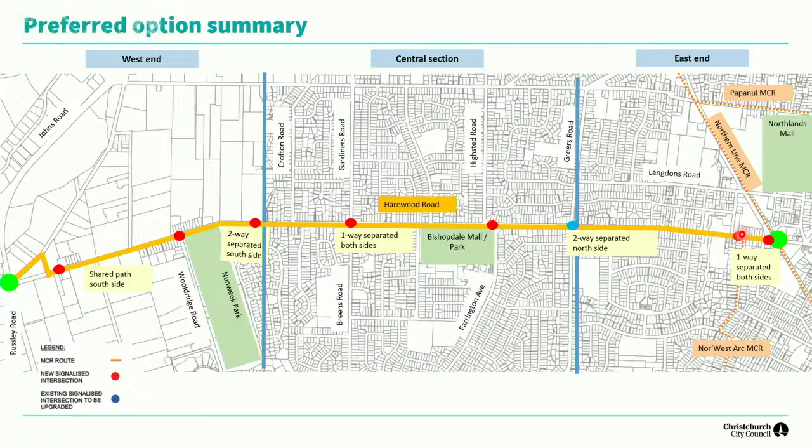That runs all the way through the Gardiners intersection with new signals, past Bishopdale Mall to the Bishopdale roundabout, where it changes to a two-way on the northern side of the road, through an upgraded Greers intersection, and a two-way continues through to the Chapel Street area, where it splits to one-ways either side of the road, running past Mitre 10.

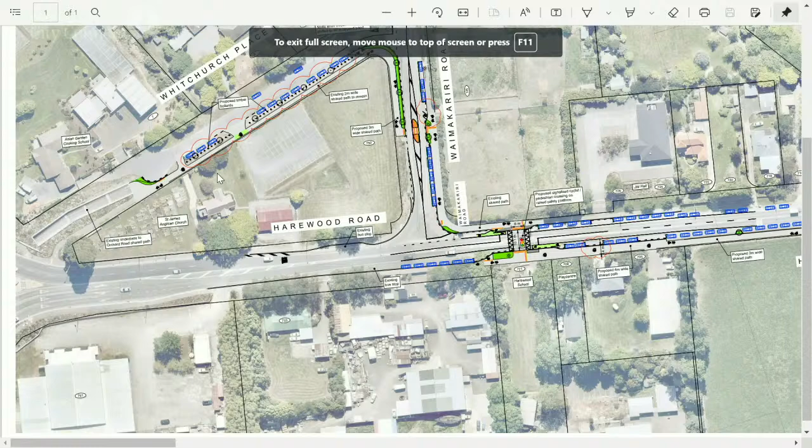If I run through that on the consultation plan - these are the plans that were available at the information sessions. We had those sitting in the middle of the room, highlighted so people could talk to them. In the red shadows there, we'd identified changes that had been made since March, with a list of the changes and a description of what they were. So you've probably seen that already.

Here's the underpass at the roundabout, shared path that runs along the south side. It retains car parking on both sides of Whitchurch Place. The path comes around and then crosses over via a central island on Waimakariri-Harewood, and the shared path continues down - that's an existing shared path. Then there's new traffic signals outside Harewood School, on a raised speed platform, for pedestrians and cyclists.

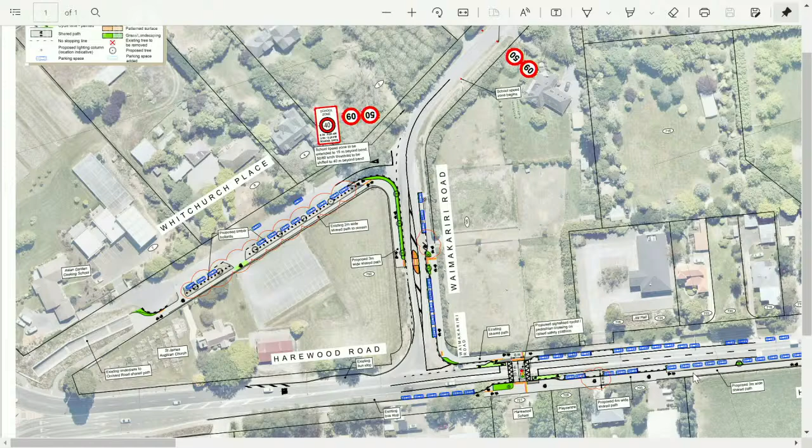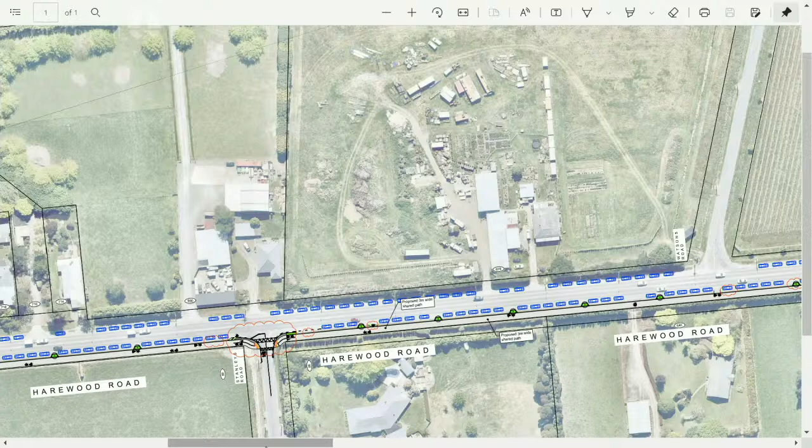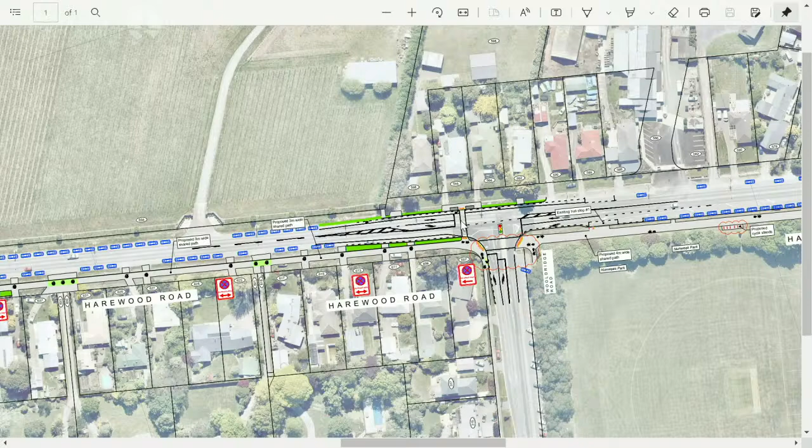That leads us to a shared path on the southern side of Harewood Road - an existing path that we'll be widening out to 3 metres. That continues along the southern side of Harewood Road, crosses over Stanleys Road, all the way up to Woodbridge Road. New traffic signals at Woodbridge Road, crosses over, provides a connection across to the bus stops to the north. We continue the shared path past Nunweek Park.

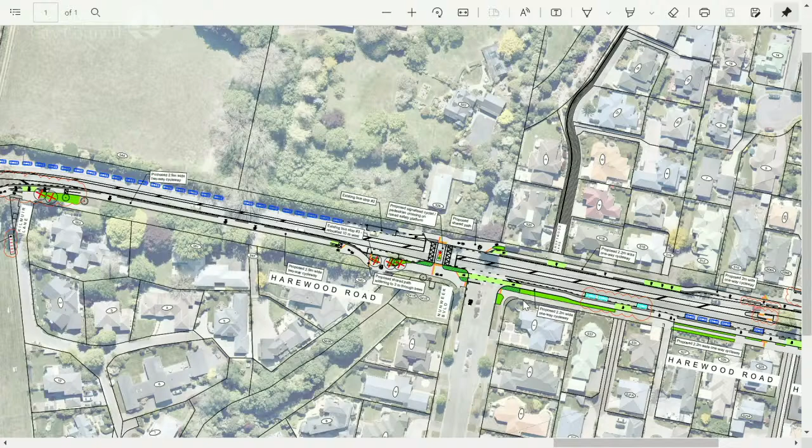Up to Nunweek Park. At Nunweek Park it was too tight to continue the shared path on the property boundary, so we've provided a two-way on the south side running through to Nunweek Boulevard, where there's another set of pedestrian and cycle signals on a raised platform. At this point, the shared path changes to a one-way path on either side of the road, and that's effectively where we start to enter the central section, or the 4-lane section. Continuing along through this section, there's a one-way on either side of the road.

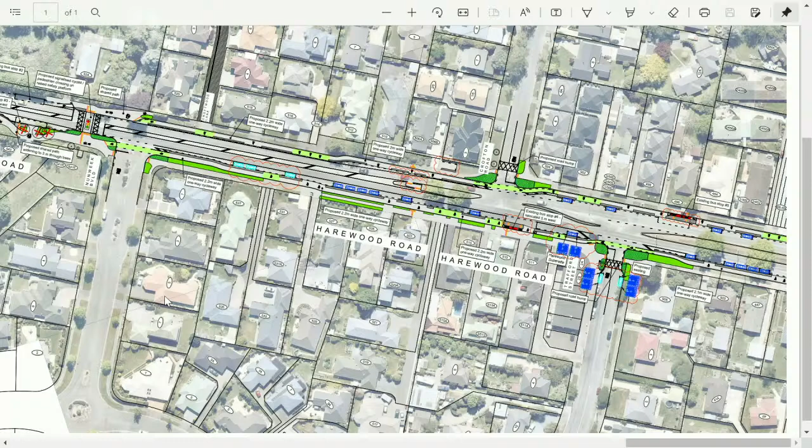I guess we'll find out. Very close up. Just give me one second.

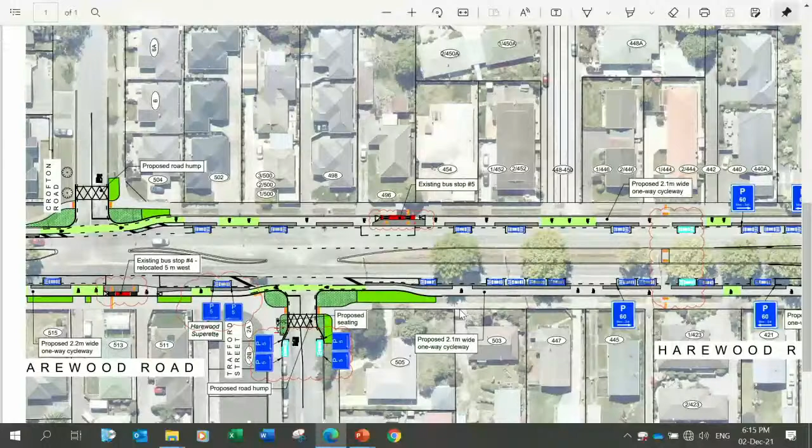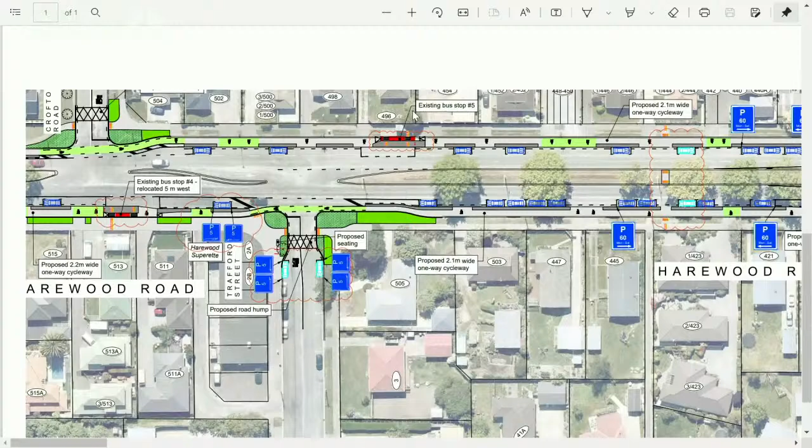Something funny's happened with that. Try and jump into the other folder. Something there. Was that?

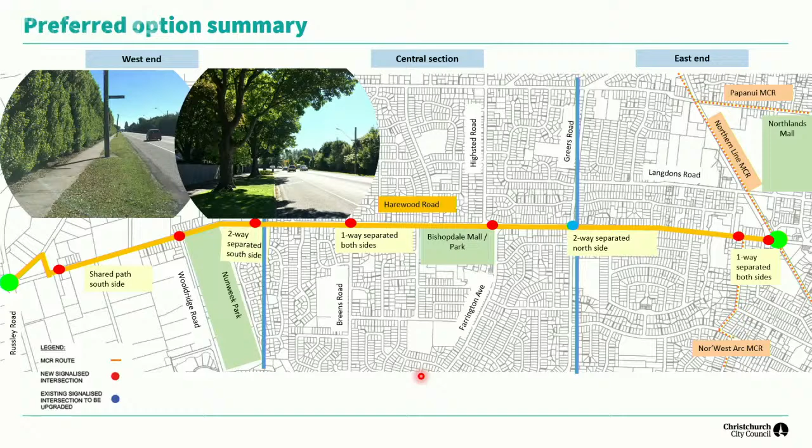So at the west end we had the existing shared path that's going to be widened. Then we run past Nunweek Park, where we have the existing trees. We couldn't widen the path, so we went up to two-way on the south side through the central section. One way is on either side, and then at the eastern end it's a two-way on the northern side.

So I now hand you over to Anne, who will run through the consultation.

So this is just a project update, going right back to just a really quick reminder of what we've done so far this year. We held the original round of consultation at the beginning of the year from January through to March, and that was our major consultation, which generated over 1,300 submissions. On the 11th of February we had our notice of motion, which Lynette referred to earlier. And going into June we then held two separate community board briefings, both with Papanui-Innes and with Fendalton-Waimairi-Harewood, briefing on the consultation outcomes from the round of consultation earlier in the year.

From there we then went and briefed the hearings panel. Again, this was live streamed, and that's again looking at all the options as well as the overview from the consultation earlier in the year.

On the 26th of October we had our community information sessions. We had a session for elected members to come through and view our display, and then 27th through to the 29th of October we held 3 days in the ex-ARA campus building in Bishopdale Mall, where we opened up for the public to come through and look at all the work that we'd done since the close of consultation and all the different options, and the team were available to answer questions.

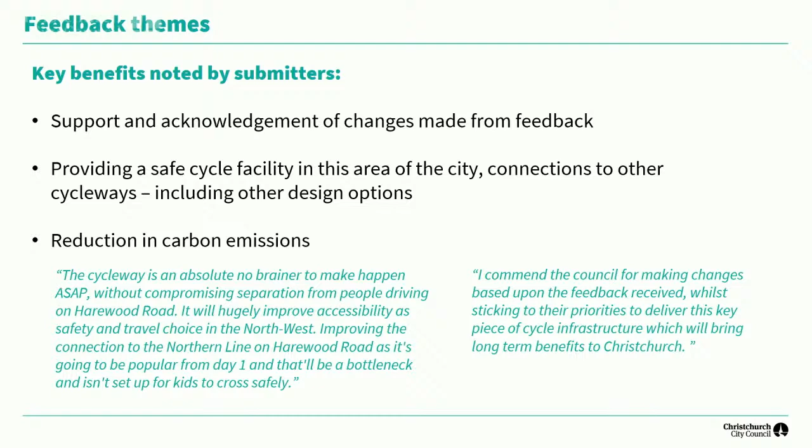Just a recap on the community board submissions from earlier in the year - I won't go through those again since we've talked about those at a number of presentations. So just the highlights and the concerns: both community boards support the cycleway program, though there is concern from both around parking loss, safety, and tree removal. Initially there was support from both boards for the overall cycleway program in the city.

Thanks, Anne. But before we move on, are there any questions from the community board or any discussion points from that?

I had one question about the 34 that didn't support - the next slide showed the reasons why. I thought it might have been financial, as someone mentioned the huge cost. Cost was probably the number one concern raised, with 16 submissions citing it.

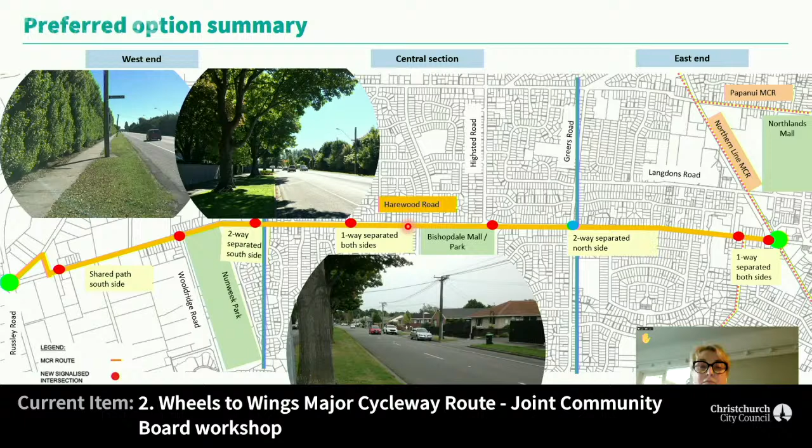Well, it might be better if we continue on and briefly touch on all of the options that were considered through the 4-lane central section. Okay, cool. And then we have all the background material on the number of parks removed for different options. Okay, alright, I'll hold fire.

Thanks, Ollie. I'll take a question from Shirish. Thank you, is this okay? First, a compliment to the staff for arranging the community meetings - they were wonderful, thank you. And a huge contrast from the first meeting, which some of us will remember, held in the Breen School. So thank you for that.

Second, two questions: do you have an overall map showing what has changed between then and now at a broad level? Second question: there's a proposal to extend one of the routes along Harewood Road - it's under consultation, which finishes soon. Does that impact our design in any way? It's Route 17, I think - is that the bus route? Oh, right.

Apologies. My understanding is that any changes we're proposing do not impact what ECAN are proposing around the number 17 bus route, or the 28, whichever one it is that goes up there.

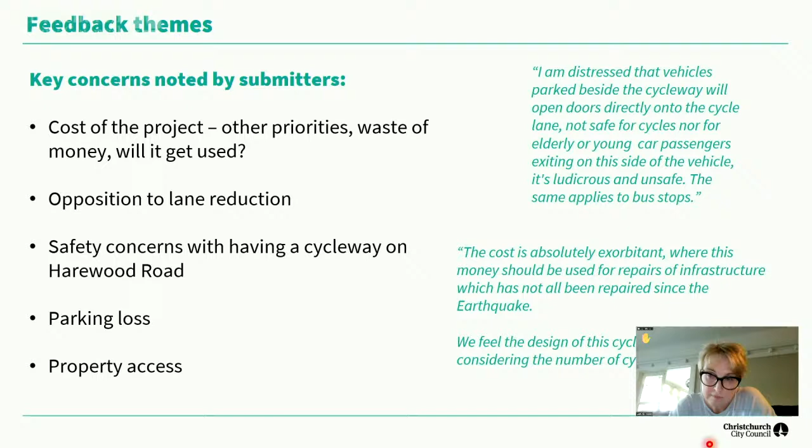What kind of feedback doesn't indicate support or no support? I was really interested in that figure because it was a significant number, where it said no clear indication for support. I'm just wondering what kind of feedback you're getting that's not showing positive or negative. It would be where people have said, I don't know how I'm going to back into my driveway - so they're not saying they don't like it or do like it, but they're raising a concern, or they might talk about something to do with the design, without giving any really clear indication like I love the cycleway, it's great, I'm going to use it, or it's an absolute waste of time and money. When they didn't give any clear indication, I didn't want to second guess whether it was support or not support.

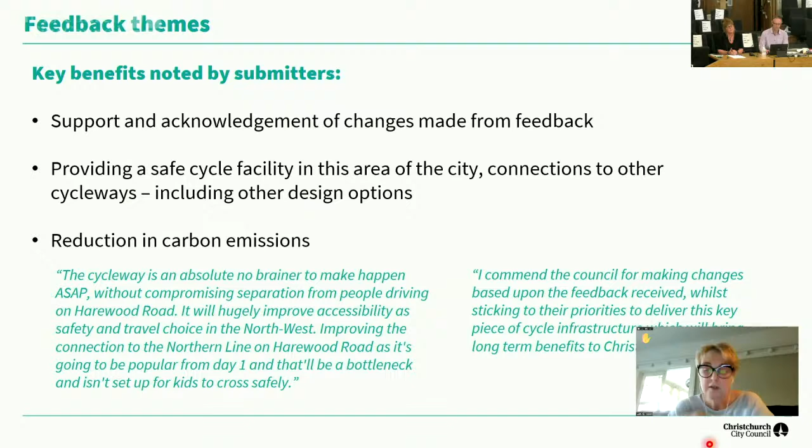Okay, thank you. And just finally, the comments around, I never see anyone using the cycleway now, and I just wonder whether it's going to encourage people to cycle. You mentioned the cycle group that came along and talked about how this is a real gap. Clearly a cycle group is going to advocate for more cycling regardless, and it's a citywide group doing that. Have you heard from, for example, the schools, any other groups, even residents, or have they been asked directly, will you use it if it's there? I'm just trying to understand whether there's an indication that there would be an increase in the number of cyclists should the cycleway go ahead.

I'll just jump in quickly because it's probably something you can answer. Just to clarify, it wasn't just the cycling group that said there's a gap in that part of the city - it was also individual people that cycle in that part of the city as well. A group came along, but there were certainly other individuals that mentioned the same thing. In terms of the school, the other thing I'd like to add is that it wasn't necessarily Spokes - it was Wheelies Wednesdays, so it wasn't necessarily a cycling advocacy group that came along either. We had cycling groups, I think, but yeah.

Yeah, no, I appreciate that, Lynette. I think the point I was trying to make generally was it's the localness of this - I'm just wondering whether the people who live in the area are the ones saying, yes, we will use it more. Yeah, we definitely had some residents that did say that. I don't think it's for a lot of the routes we've had any. Sometimes you'll get a school that will contact and say they are really keen on riding, like Papanui High School with the Papanui Parallel. But a lot of the routes, it's people riding to work, some riding to school. It's a big part of the community that won't submit on the consultation but will end up riding. I think it's a couple of slides along from this one where we look at how many people are riding at the moment and how many have increased their riding in the city over the last 2 years. Thanks, okay, thank you.

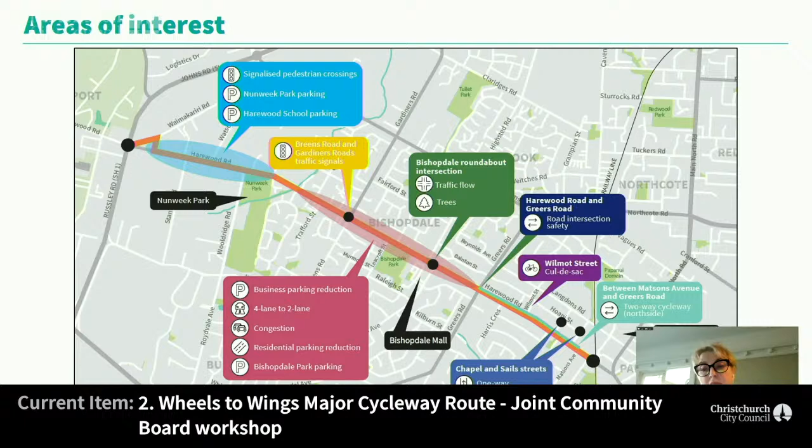At the western end in blue, some people really liked the signals outside the school and at Wooldridge. Some people weren't so happy with the signals at Wooldridge because of parking removal. Harewood School was very supportive of having the signals and the safety of the children. Through the central section, removal of a traffic lane was a very key topic, and the congestion that would lead to with the removal of the lane and signalisation of the roundabout. Connected to that is the removal of parking for businesses and residents, and parking specifically around Bishopdale Park during events that are on there.

Bishopdale roundabout, the removal of trees - in the latest design we've managed to retain all bar maybe 3 of the trees. There's a question mark around that until there's some more investigation done.

Down at the eastern end, by Golden Age, feedback around a 2-way outside rest homes and the impact with elderly arriving and leaving, and Chapel and Sails Street being swapped around for one-way movements to make that 2-way safer.

There's a lot of support for the Breens Gardiners traffic signals that was consulted on in 2019.

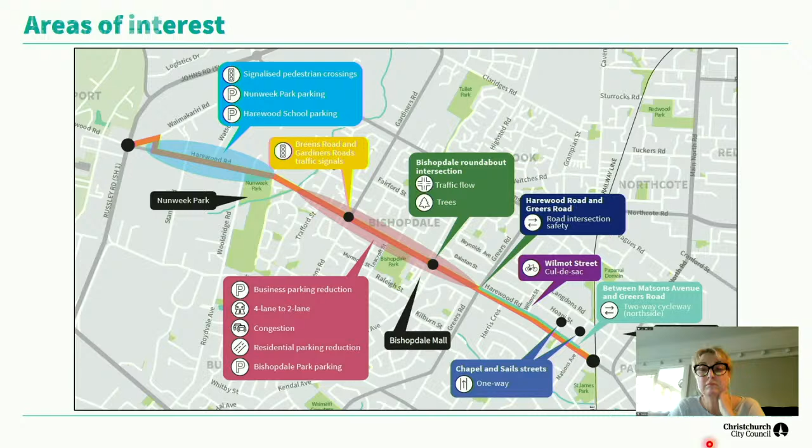That's really opened up a part of the city and some longer rides that people couldn't do previously. They also ride along the Waimakariri River.

As part of that link and connection, there's an obvious link missing between the Harewood underpass and heading back towards the Northlands Shopping Centre, Papanui parallel area. So there was a lot of feedback to say there's a wee triangle there that people like to ride, but they feel really uncomfortable when they're on the Harewood Road section of that.

Yeah. Yeah, it does.

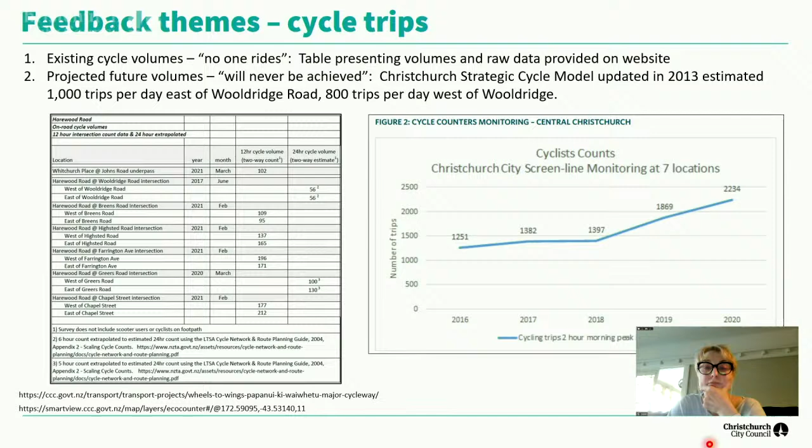So the table on the right is pulled from the mode shift, regional mode shift greater plan, which is a Waka Kotahi document, and that's showing the number of cyclists in a 2-hour period around the central city. You can see clearly from 2018 to 2020 there's been about a 20% increase in riders in the city every year, and that's about when the MCRs have really started to come online, the major cycle routes. So people are starting to use the facilities that have been constructed.

If you look at a recumbent bike or a bike trailer, they're 900mm wide, so a 1 metre path doesn't cater for them. So if you're looking for people that have mobility impairments, this path would exclude them from using it.

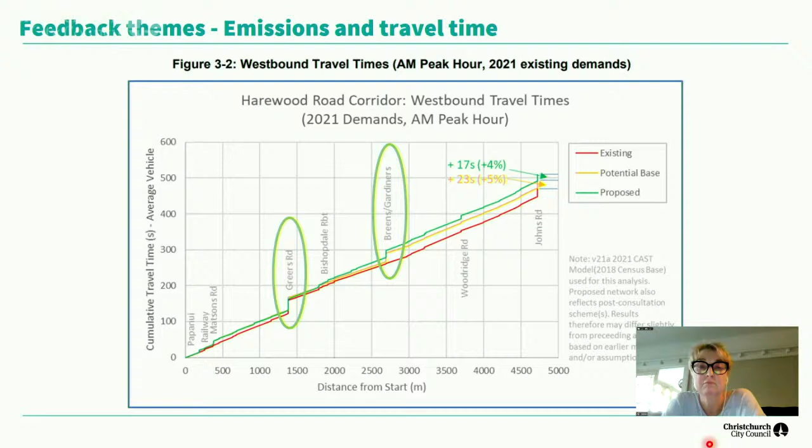So in this case here, out of the 40 second increase in travel time, about half of that is because of improvements that aren't cycle related. The independent review came along, looked at it, and said they agree with, or concur with, what was told to the hearings panel.

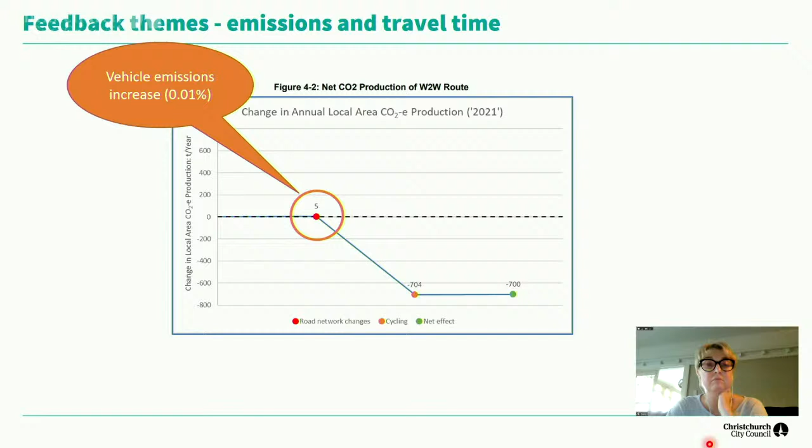Now, the other thing that raised, with an increase in travel time, is what does that have in terms of emissions? Is it going to be negative on the community? This graph here shows the CO2 production on the vertical axis, and shows the increase in vehicle emissions because of the scheme. This increase in vehicle emissions is looking at the area of Harewood Road out to Sawyers Arms Road and Wairakei Road, so it picks up all the rerouting of vehicles and the vehicles that go onto the side road.

So it shows there's a very small increase in emissions if people don't start riding. When people start riding, there's 700 tonnes less of carbon emissions. So people have hopped out of their cars, started riding the bike, and there's a big saving. The net decrease in emissions from constructing the cycleway and having people change mode is a reduction of 700 tonnes a year.

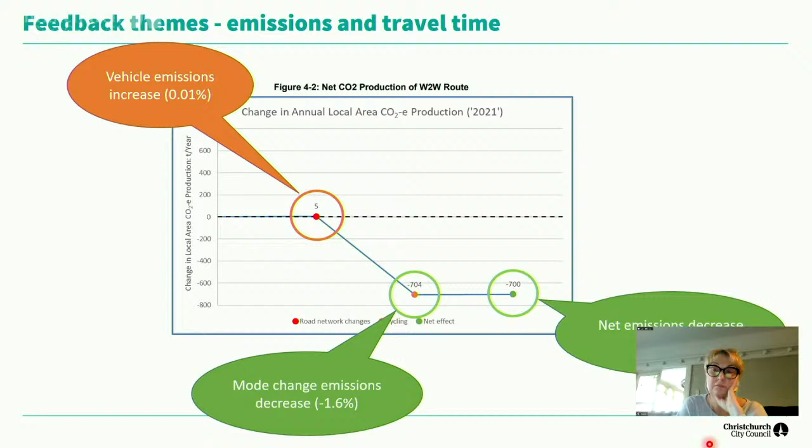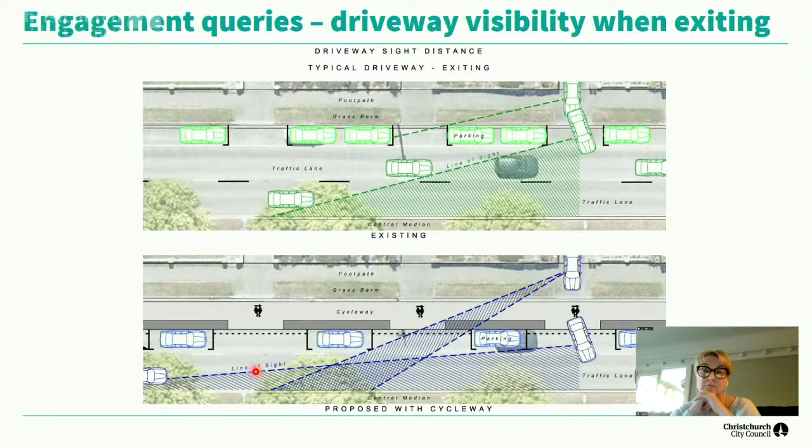That's all we've got. Thank you.

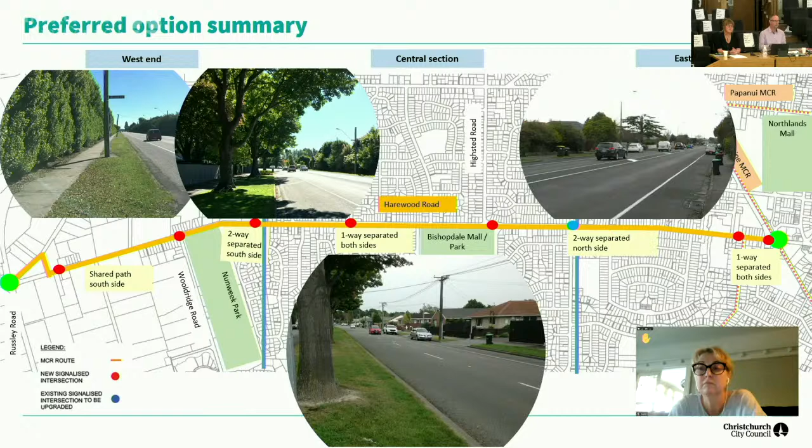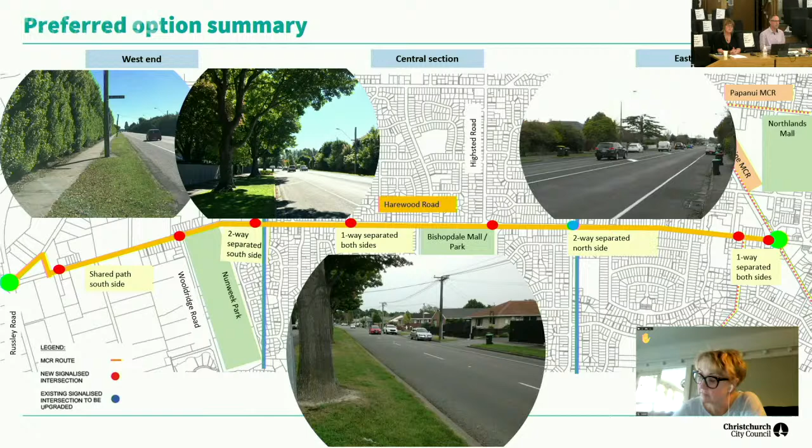Yeah, so I guess the first point would be that this is a reasonably long route, 4.6 kilometres, and not everybody is riding the full length of the route. A few people will, but there are a lot of movements within that section. So Nunweek Park, for example, is a key destination for sporting events, and Bishopdale Mall, with people coming out of the side roads and riding over a short length of that. If I consider it from the western end at the underpass, I talked about the shared path on the south side—that's that photo in the top right there, top left—that's an existing path.

And the most cost-effective option for that section is to widen the existing path. We considered one-ways on either side of the road there, and what that did is narrow the road down. It removed any potential for people to pull over onto the side of the road, and it had a higher construction cost with concrete medians on either side. It links in well to the school and ties in well to Nunweek Park with the existing shared path in front of the park. So in terms of the selection of a shared path through that section, it was the lowest cost option that had minimal impacts on vehicles travelling and the community it passed through.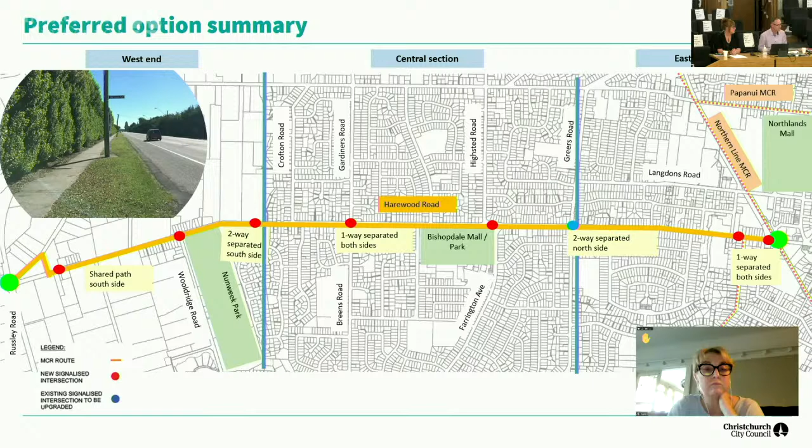Yeah, sorry, you can ask a question? Yeah, well, I appreciate the rationale for why we're doing the shared path on that end. I'm just keen to know, why does it then change to the one-way separated on both sides?

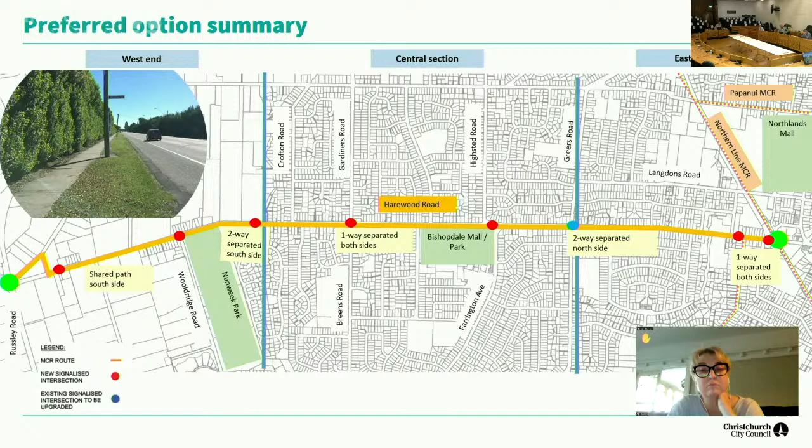Yes, okay, so continuing along through the central section, we did look at a number of options through there. If I go through to the pictorials, that might be better. Okay, so this is the one-ways on either side. What the one-ways on either side do is provide a facility where riders are travelling in the same direction as vehicles. People coming in and out of their driveways know to look to the right—they always look to the right and they'll see a rider there.

It does require the removal of a traffic lane, and all of the options that are safe and viable do require the removal of a traffic lane. It comes down to how much parking needs to be removed. This option, compared to all the options, removes the most on-street parking, and through the central section it's about 50% of that.

This option, which is the paths either side of the central median, also removes a traffic lane. It removes a lot less parking, so it removes 20% of the parking. But it has a disbenefit in that to safely provide for the riders, the U-turn pockets need to be closed, and access to the side roads is restricted to left in, left out. So it has a greater impact on the wider travelling public, and it wasn't preferred for those reasons.

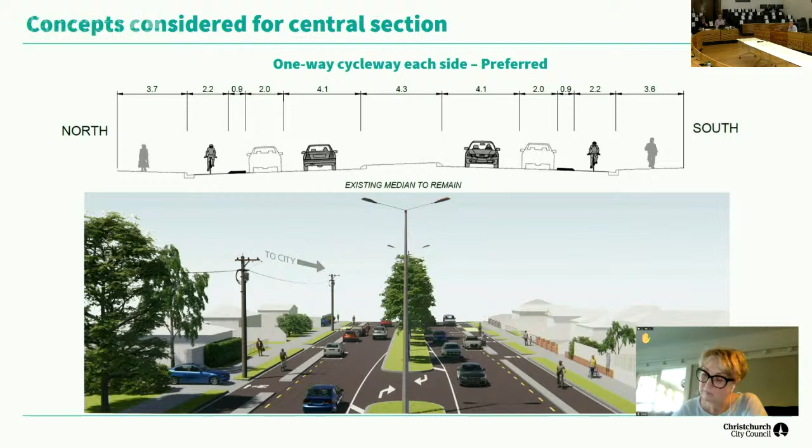It also requires any rider to enter that facility to cross over a traffic lane. So if we compare that to the preferred option, if you're on the north side of the road, you can enter the cycle lane without having to cross a traffic lane. You can't do that when it's in the central median.

This option here was very well supported by the community. A lot of feedback to say, just do this. And interestingly, a lot of people said the trees in the middle drop so many leaves.

Particularly across from Bishopdale Park, a couple of people there said they have piles of leaves that are a metre high outside their property, and it doesn't matter, they can remove them every day and they're back there again. Council do a really good job at removing them and coming more frequently, but the leaves are always there. So if you chop the trees down, they'd love that.

But it doesn't look very nice, and it also retains the 4 traffic lanes. With those 4 traffic lanes, there's an existing speed issue. Traffic along the road at the moment has an average speed of about 55 km an hour. Compare that to Fendalton Road, that's 50 km an hour. So it's about 4 or 5 km an hour faster along Harewood Road than what we'd expect. It also means that any person trying to get into that central median needs to now cross over 2 lanes of traffic travelling at a higher speed, so it's less safe.

This here provided the shared path on either side of the road. And while there was some support for this because people thought it could work quite well, I don't think what was really well communicated to them was that it removes the same amount of parking as what the preferred option does. The reason for that is when a person is turning into their driveway or out of their driveway, they still need to see people riding along on a separated cycleway or a shared path.

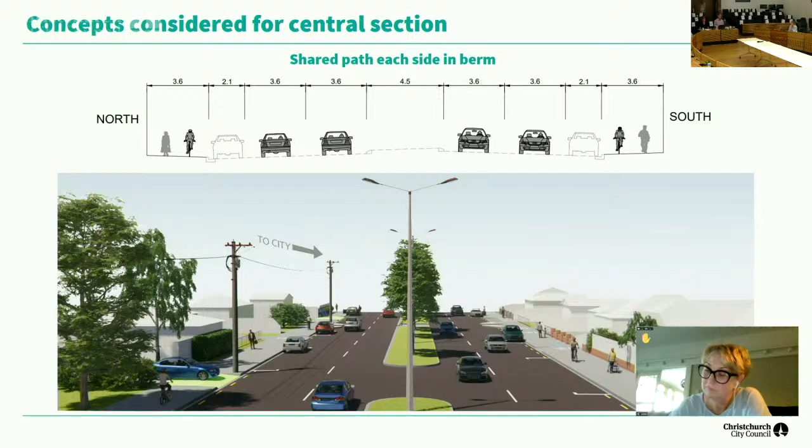So it has that same parking loss. But that aside, you can see in the bottom left, there's the blue car coming out of the driveway. Where you have high fences, that driver can't see whether there's a person on a scooter or a bike coming along the shared path. So it's not safe, and it doesn't meet MCR standards.

The road swap provides an arterial road all on the northern side of the central median. So on the left side, that's where all the traffic would be. And on the southern side, it provides a low-speed access road with a 2-way cycleway.

Now this works well for riders once they're on the facility, but it has the similar issue of being in the central median, that all riders on the north side of the road need to now cross over 2 traffic lanes to enter the 2-way facility. It also results in double the volume of traffic outside properties on the north side of the road. And the offset of that is that for the people on the south side of the road, now there's maybe 1,000 vehicles a day, so it's a much nicer environment on the south side.

It does require indented parking bays on the northern side to keep up the parking numbers, and that has quite a cost associated with it. We're looking at in the order of 3 million above the consulted option in civil works to provide this. And that doesn't include the relocation of underground services. We do know running under the parking bays on the north side that there are 3 11 kV, so high voltage cables, that will have some impact on them.

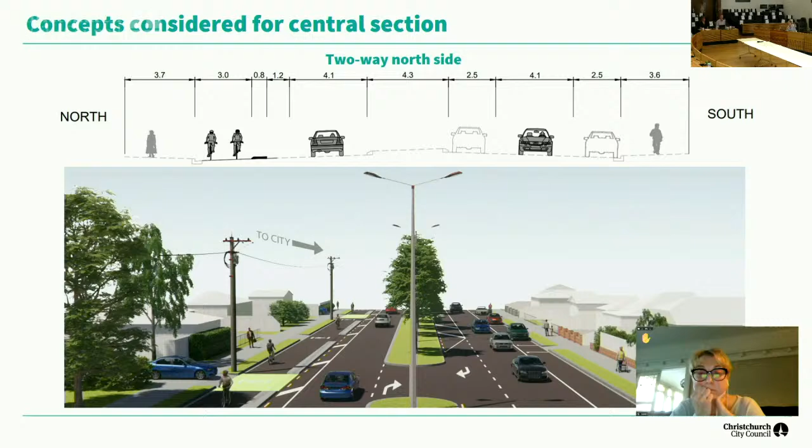It does. So just so I'm clear, when we were looking at the submissions, there was a lot of talk around option B. Just so I'm clear, is this not option B, is this option 3 that we're talking about? This is option 3. I'm sorry, this is option 3.

Okay, cool. So where there are issues, it comes down to safety, and it comes down to one side losing more parks over the other in a way, doesn't it? If you're looking at putting the cycleway to one side, whatever side that ends up being. But aren't we losing more car parking if we choose the preferred option that's currently there?

So it's sort of like, do you see what I'm saying? So the preferred option, you're losing a lot of car parks, but actually if you went with an option that's stuck to one side, you'd be keeping more car parks, albeit one street would lose more car parking than the other, but wouldn't there be more car parking left over overall? Yeah, is that what you're trying to say? Yeah, but it's about the equity of where that parking is, what the team have tried to balance. I see. So it's about saying, actually, to get across 2 lanes of traffic, across a median, across another lane of traffic, to get to your car parking is less equitable than trying to balance, losing a bit more. Ollie can talk to the absolute numbers, but it's trying to balance that equity of what we're trying to do.

Yeah, so it's trying to sort of keep both sides of the street happy by kind of taking away car parking on both sides in a way, isn't it? Or it's acknowledging we're balancing everyone's needs, that's really what we're trying to do. Equally unhappy, yeah, well that's kind of what I'm trying to flush out here. You're sort of, you are in a way. There's going to be happy people and sad people with any design that's put forward. It benefits somebody and disbenefits somebody else, and it's a real balance as to what weighting you'd put on that.

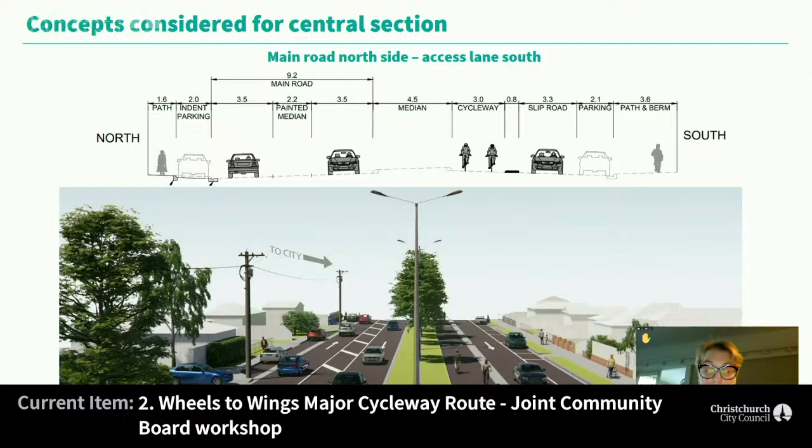How many trees would go if the cycle lane went down the centre? Well, it'd remove all of the trees. Yeah, sorry, I'm after a number - do we know the number? I'd have to count them. Okay, we're going to count them.

Ali, have you got another question? Sorry, can you hear me now? You just froze for a moment, Ali. Have you got another question? Yeah, I have.

Just going on - oh yes, the parking loss for the central median, there was virtually none. Is that correct, for the central median strip? Yeah, that's right. It has 20% parking removal, which is looking at the bus stop improvements and the improvements for pedestrians crossing the road. The current standards now require longer bus stops and longer tapers leading into those. And where pedestrians are crossing the road, the cars need to be set back further from those crossing points now. But it does have minimal parking removal.

Where the lanes change from one way to two way to shared, all the length along, what's the way that cyclists move from one to the other? Yeah, so approaching the signals, there would be an advanced loop that would detect the rider and provide a green light for them to cross the road, depending on how much traffic's on the route. We also add in wayfinding signage, which is signage to the destination towards Northlands Mall or Nunweek Park.

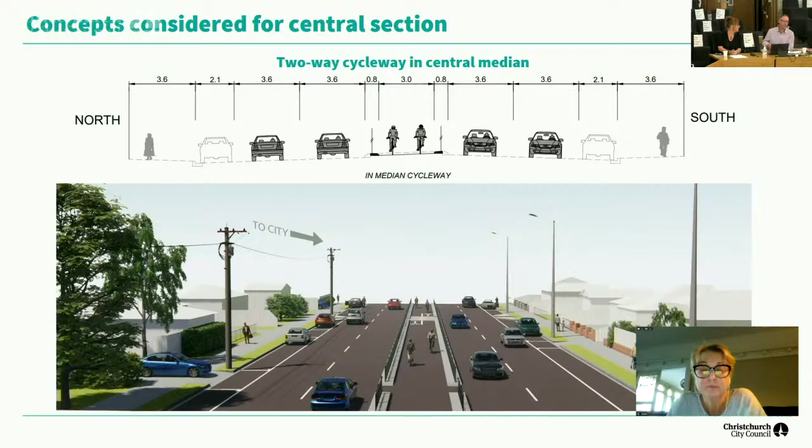41 trees, thank you Ellie. Shirish, thank you. Potentially 60, depending on what the final design is. So minimum 41, potentially as high as 60. We'll get that clarified for your submissions. Thank you, Shirish. Thank you, Chris.

An oddball question. I was attracted by the slide called the wider connections, and I'm looking at it now. If you could please bring it on the screen.

That one. And you talked about how people come from north and all that. So is an alternative to Harewood Road still on the table? Or is it an absolute no discussion point? Because if you look at Sawyer's Arms Road, as has been suggested in the past, it could meet the requirements of the people up north trying to link. So is that still on the table, or is it absolute no?

Look, the way I've drawn this line, from the underpass, that's a key crossing location, and that's really fixed. The other end is down here at Northlands Mall. In terms of the evaluation of potential routes, we did go up as far as Sawyer's Arms Road, and we went down as far as Wairakei Road to the south.

What Harewood Road does is it connects to parks and businesses, and it provides a really direct route through to the Norwest Arc on Matson's Ave. The Wheels to Wings route has a strong connection for riders onto the Norwest Arc, heading down towards the university, and then onto the Northern Line, which is the existing route, heading south and then finally up to the north. So Harewood Road sits right in the middle and has the best connectivity.

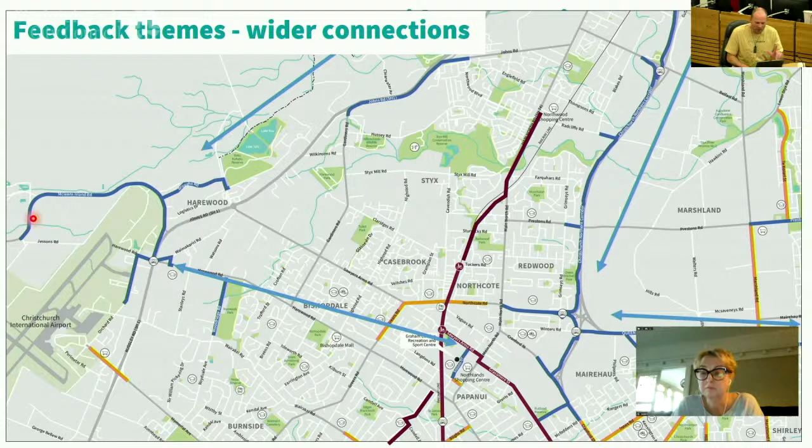Thanks, Ollie. Shirish, do you have another point or question? Thank you, Simon. Thank you. I've got a question on option 3, but only one, and then a couple of questions on other topics.

Might be helpful, sorry, if we could have that option 3 slide up again. My question is, relative to the preferred design, what impact does the option 3 design have on U-turn bays and on cross streets and intersections along the route?

Well, it removes the U-turn bays because all the traffic is now on the northern side of the median. So properties on the southern side would have two access points, into a one-way road. So it'd be a right turn or a left turn into properties on the south side. In terms of restrictions to side roads, it doesn't have any restrictions to the north-south roads.

Thank you. On the Bishopdale roundabout, there was mention of feedback on, I guess, the understanding of how that roundabout would function and the value of having the animation in the second round of consultation. I'm interested to know where a partially signalised roundabout like that has been done before. Up in Tauranga, there's a number of signalised roundabouts with pedestrian cycle crossing facilities in them, and they're used extensively over in the UK.

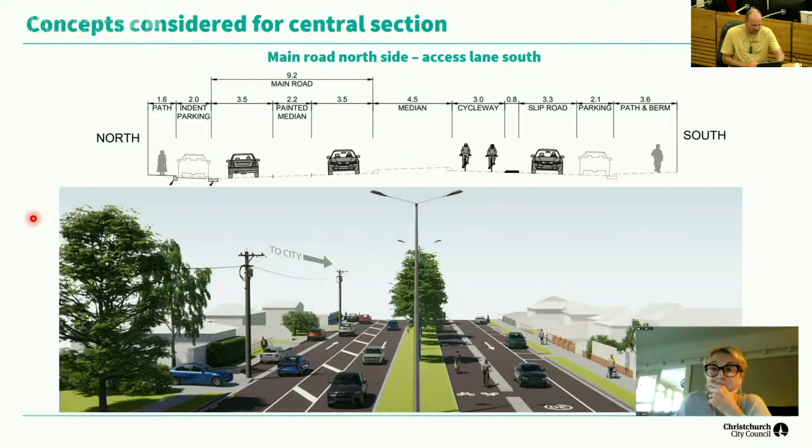Okay, on the carbon impact of the project, apologies that the technical note came through reasonably recently, so I've had a quick look at it, this might have been answered in it, I'm not sure. My understanding is that we're looking at a net emissions decrease modelled of 700 tonnes a year. I'm wondering if any modelling's been done on the carbon impact of construction.

Not that I'm aware of. Not as part of this project. Don't know.

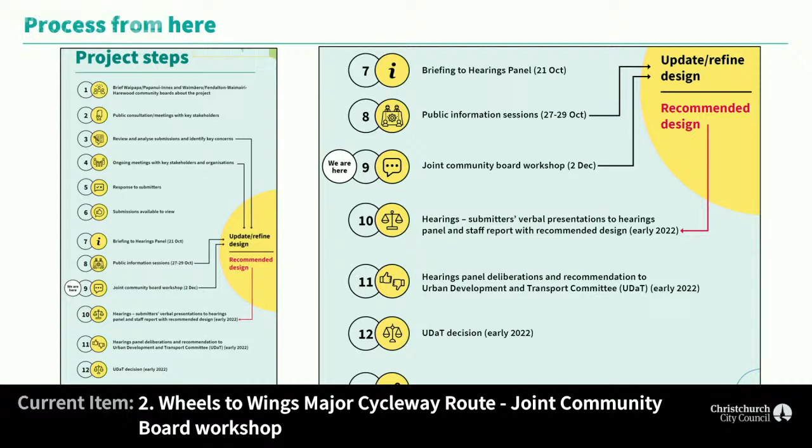We've got one last quick slide to highlight the next process. We're at number 9. Next is number 10, the hearings panel - the submitter's verbal presentation to the hearing panel, expected early in 2022. Your submission will inform that hearings panel, as will each community board's. The deliberations will happen after that, and their recommendation will be forwarded to the Urban Development and Transport Committee following that.

So it's a bit of a breather before Christmas, and then after Christmas we'll be hitting the ground with the hearings panel again - that's the plan. But I would like to highlight, and please pass on to your boards, if there's anything we can do to help, any information we can assist with, please ask. We want you to have all the information you can to make the best submission you can.

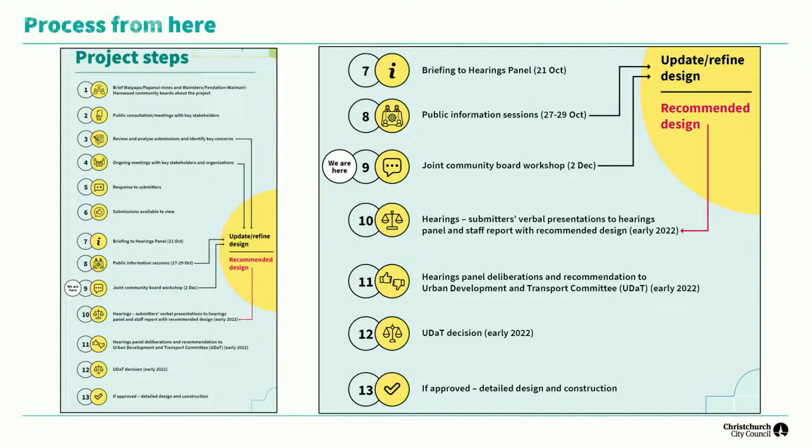Thank you, Lynette. Any questions on that forward process, Mike? Just number 14's missing - the party at your place. I don't know your address. Party on Hussey Road. There we go. Thanks, Mike. Nice to have a bit of humour at the end there.

We started with karakia, and in a Ngai Tahu context, I think we would close with karakia as well. Simon, would you mind?